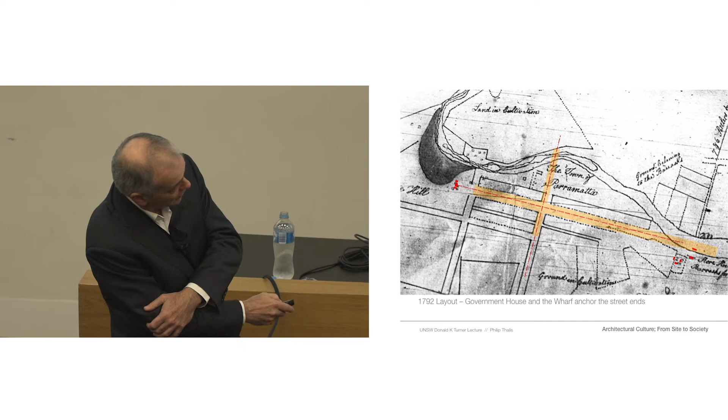200-foot wide street, which in a sense is the extension of the space of the river itself. Of course, the journey was up the river to Parramatta before Parramatta Road was established. And so you arrived at the Queen's Wharf, which is unfortunately no longer there, but you can see the spot. And the street went straight in and up to the rise, which is where the Government House was put. There was also the cross street, Church Street, which was marked by St John's Church here, and then the jail and a bridge, which I'll talk about shortly.

But there was a very important change, and this also affected the centre of Sydney in around 1805, 1806. So whether it's Governor King or under Bligh, these streets, as they were in the city centre, were narrowed from 200 feet to a much more rudimentary 66 feet. And George Street, in fact, was narrowed. You can also see Church Street being narrowed there.

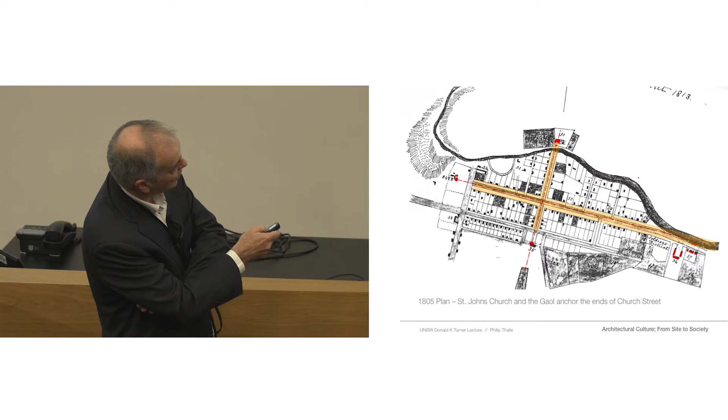And we don't know exactly why this was done. I've never read anything about it. We haven't been able to research this, and it's a very interesting further dimension of public Sydney that someone else could extend. But I think it's had a devastating impact on our sense of generosity of public space. And of course, if you go to a Melbourne or a Canberra, you'll find that the street reservations are much more generous. In fact, they're some of the most generous in the world.

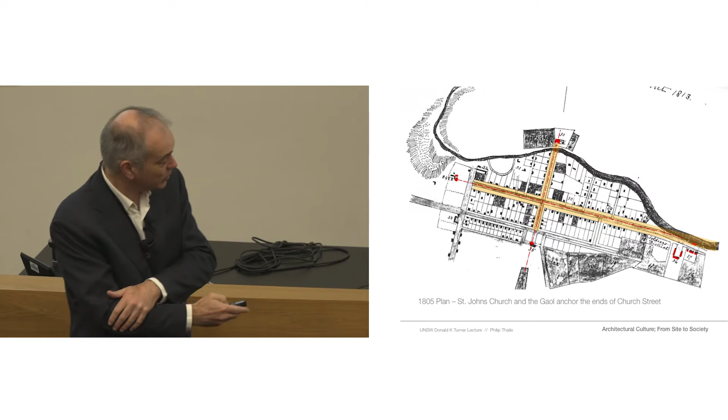But that was the aspiration in 1792, and of course that's nothing to do with traffic, it's to do with a sense of place. And when the first Europeans arrived in Parramatta, they actually talked about it being like an English park, which was because of the Aboriginal practices of fire stick farming, so it had tall canopy trees and grasslands. And that was the way of the Aborigines managing this. I could have put in some quotes about that. It's a very interesting issue. So very interesting to look at Parramatta.

And then we had a project as part of designing Parramatta, but in fact it was a revisit of the project that we'd already undertaken when we did the DCP for Parramatta City Centre in 2000. And that was to look at whether we could interpret the 200-foot width, 60-metre width of George Street, which is still there, and reconnect the city east-west on its spine. And so if you go to George Street, what you'll find even today is that many of the taller buildings are actually built back on that earlier alignment.

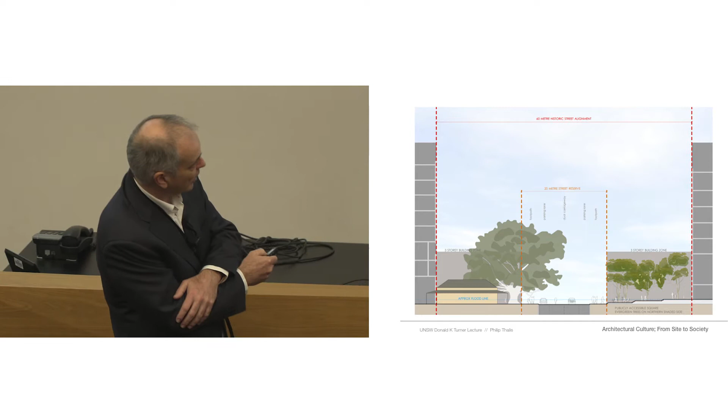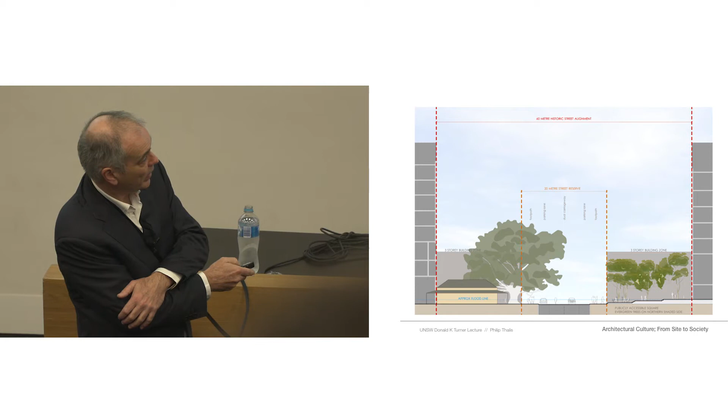And generally what occupies the space between the two alignments, and it's not exactly centred, it actually shifts from one end to the other, which we've very accurately plotted, what you find is all the heritage properties. You find some of the significant trees. You find, in fact, a number of the public buildings. And so it'd be quite easy to have a double scale where you actually allow the taller buildings, which are inevitable in a city centre, to come at this scale, but you can still read a secondary scale within the street.

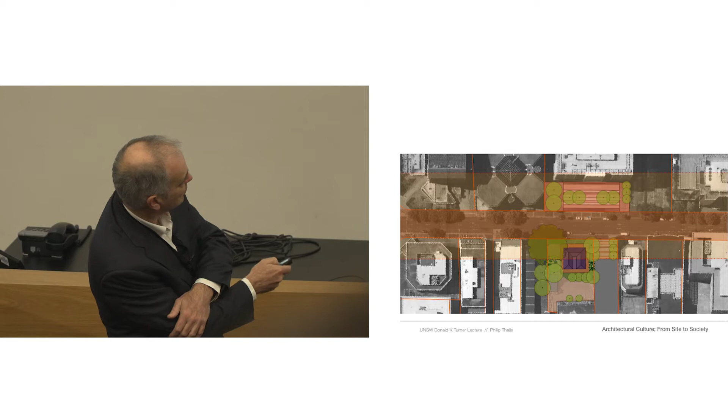And in plan, you can see it here, and in fact, this is the building which the light rail company is in. And they've got a big square in front of them. Here you can see the heritage buildings, trees, this huge fig tree and the like. So it's actually a project which, with vision now, could be implemented very easily. And what it could do is actually create not just the north-south axis of Horwood Place, but in fact this wonderful double-scale avenue which talks to both the original foundation plans and then the lived life of the city over the 230 years since that time. So all these buildings, and this is a wall, would be in that space.

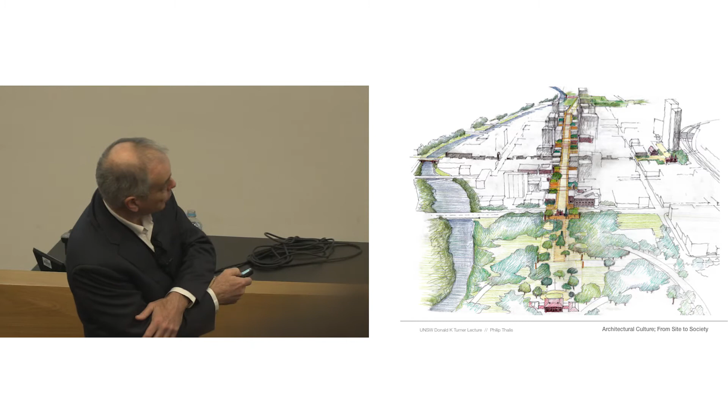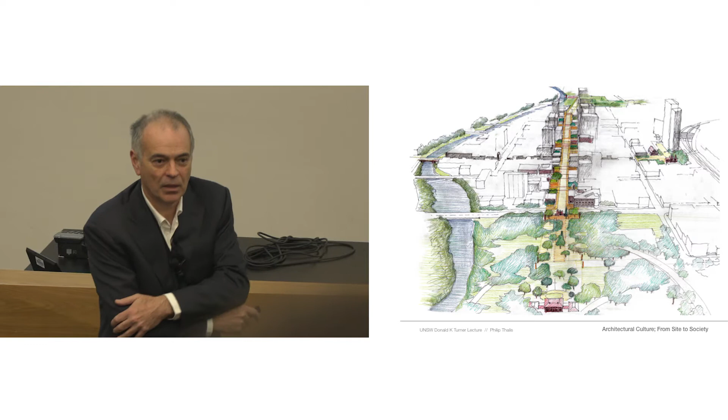And so the intention and the drawing that we did for this public Parramatta project, and the projects with the artists Michaelie Crawford and Jenny Turpin and Jane Irwin, the landscape architect who just came in. So the project you can see from Government House, the double scaling of the street, the reconnection and reinterpretation of Queen's Wharf, the extension of the river into the town. So the attitude that I bring is not one of being a historian or an architect, it's one of actually trying to fuse culture and fuse an idea of place and make a project for today and into the future that understands the history of the site and projects it forward in a positive way.

So it's not a sense of loss, it's a sense of what can we add, how can we make it live today. And of course, there's also the gatehouse in the foreground. There's actually lots and lots of other towers proposed.

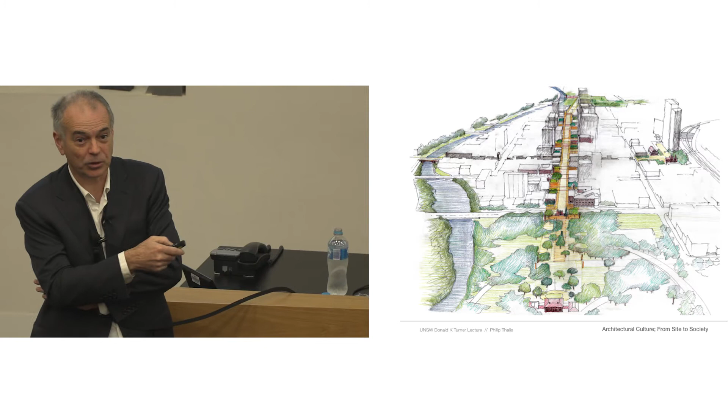The other aspect I want to talk about is then our two projects on the riverfront in Parramatta. And so just the other thing to say is, of course, just as the light rail is being put rather inexpertly into George Street in Sydney, there is a proposal to put it in Macquarie Street. It really should run in George Street, and it should run right out to Sydney Olympic Park.

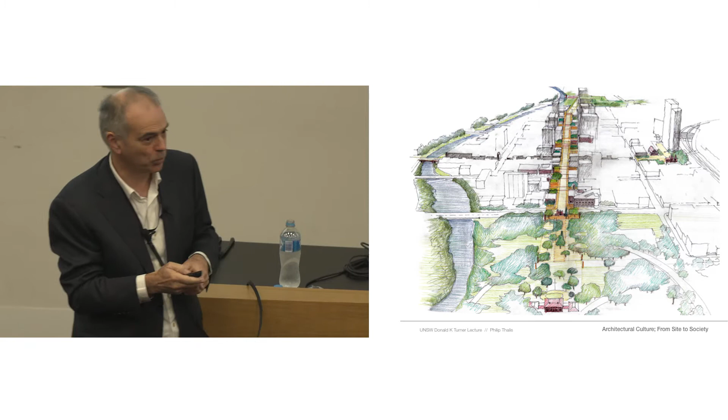If George Street's the most important street, it should actually have the most attention, and the light rail needs space for the stops. In fact, that would work beautifully with this concept, because you could actually insert the stops much more seamlessly than in the other narrower streets of Parramatta.

The other very interesting cultural program, and this wasn't in the early plan of Parramatta, where most of the riverfront was in fact private, but Parramatta sits between the park of Parramatta Park to the west and what should be the garden, the actual garden suburb of Rose Hill. It's just a bit short of public space, but we're trying to help council extend that idea.

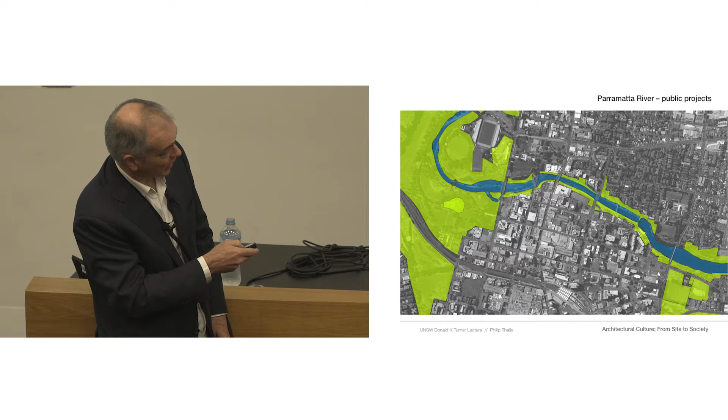But the great project that the City of Parramatta has been implementing over years is to reclaim the foreshore as public land. And the two projects that I'll show you is our work on Lennox Bridge, which is complete, and then the escarpment boardwalk, which is actually going to tender tomorrow morning, and there are people in the office working on it now, not me, I'm sorry to say.

Here's Lennox Bridge, which was doubly extended, had a tram line put on it. In fact, it's going to get a new tram line put on it after our project. And we added, at the riverbank level, 2 portals through the bridge, which are pedestrian cycle portals. And when you see the geometry of Lennox Bridge, the curvature of the path is really to create a setting which Lennox Bridge never had.

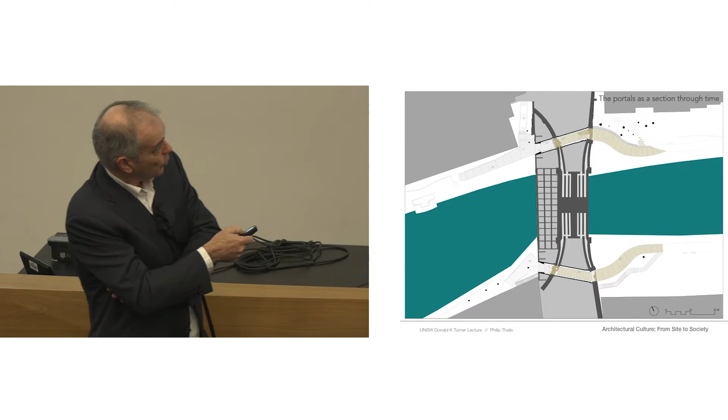Now Lennox, in 1835, there was discussion between him and the Assistant Surveyor General Perry, where Perry in fact wanted portals and Lennox said he didn't want portals. And they had an argument that went all the way to the Governor, and the Governor said, well, as the foreshore is all private land, with the exception of this side, we won't put portals in.

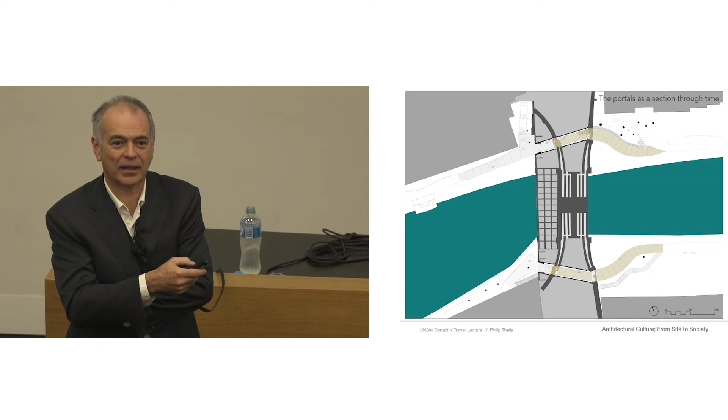Of course, this is the argument we had again in 2010 when we started this project again, and in fact now all the riverbanks are public land, and the bridge is a blockage to the public land, and so the portals were the preferred solution. But you can see that when we inherited a feasibility study by Arup, the idea was to take the portals straight through these curved sides. We in fact displaced them to the outside of Lennox's geometry, and I'll show you why.

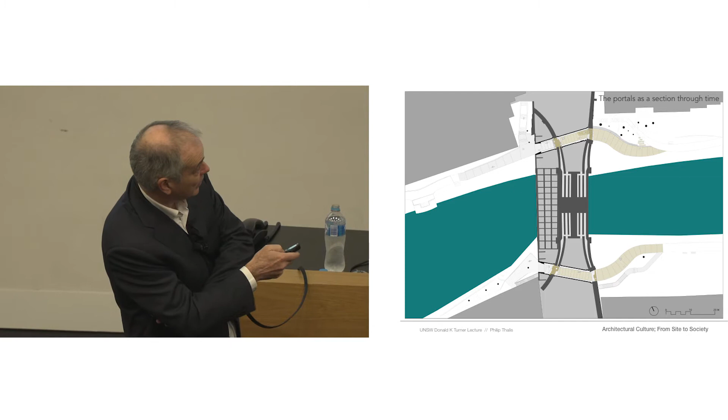So really the portals are a section through time, and we wanted to make that apparent. So when we had to actually cut through Lennox's walls, we cut through with surgical precision so that it's a new intervention. And in fact, there's a 2-ton stainless steel shelf angle, which is an interesting detail.

Because the Heritage Council said this is basically over our dead body, one of the conditions was that the bridge, which was in a very dilapidated state, was restored. With Design 5 we reinstated the balustrade and cleaned the bridge forensically, so it's probably in the best state it's been since about 1840 in terms of its cleanliness and the sandstone.

You can see the curvature, the curtilage for the project, and then the portal. We aligned the portals at this point because we didn't have to cut here. This is where, in fact, it was an unbonded connection. We inserted the lintel, so we didn't have to cut the stone there—we only cut this side. It's like a surgical extraction. There's no new fabric other than two centimetres of steel lintel on the face, on the outside of Lennox's

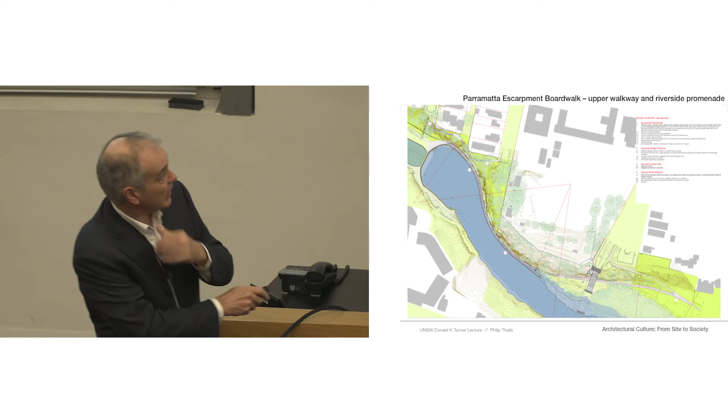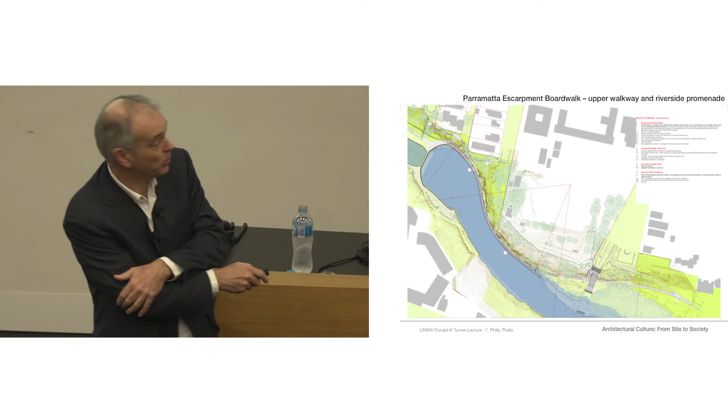At the eastern end, now about to go to tender, is the sort of yang to that yin: a 500-metre boardwalk, of which 250 metres is suspended over the water in this S-bend, then goes to land under a heritage bridge, MacArthur Street Bridge, where there's a place and an artwork by McGregor Coxall, this project, also with Jane Irwin, connecting to the existing path system.

We've had to re-document it because this is in concrete to withstand ferry impact. There's now an upper walkway in metal which cantilevers over the lower one. You can see the curve of the lower walkway and then the more miniaturised curve of the upper walkway above it. So while one project is a project of historical excavation, this is a project of addition.

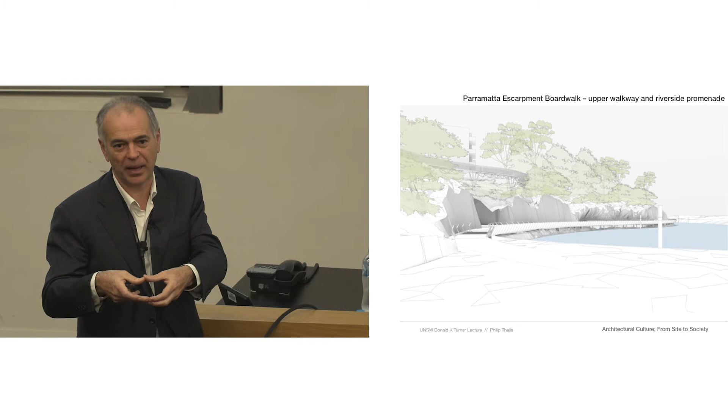They're completely contrasting in almost all of their values, but what they will do is take this maroon part of the riverbank and extend it into Greater Parramatta, allowing connections to the University of Western Sydney and the like.

It's very important in intervening in one of the only places where shale is visible in Sydney. These are cut shale cliffs, but you'll be able to go there and see the construction in due course, we hope.

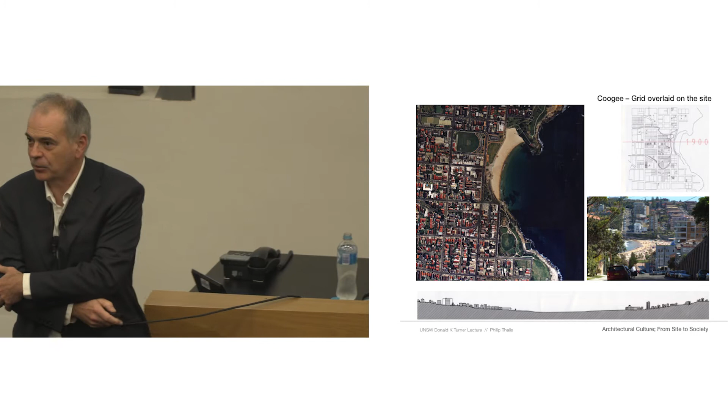We're actually fascinated by the material of Sydney, and we see the city as a resource. We've also, through our teaching and research, been forensically trying to find the great foundation projects of the city, and this is one we're particularly keen on.

Coogee, which is actually a plan by Sir Thomas Mitchell, the Surveyor General, in 1836, redone in 1856. It has this most extraordinary relation to its topography.

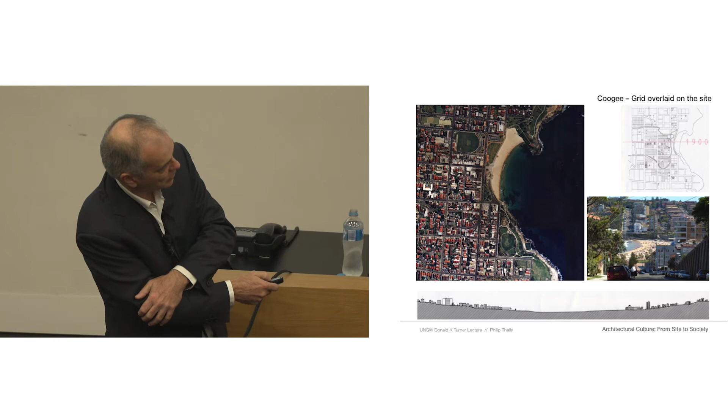This is a cross-section that our students at UTS drew through Arden Street, one of the steep streets in Sydney, and this is an aptly named street, Beach Street, which actually has a beach in it. There's a lot of criticism that these streets don't follow the topography. In fact, the Americans, if you go to San Francisco, call these section streets, because they're streets that reveal—and are challenging physically to walk around—but they reveal the topography.

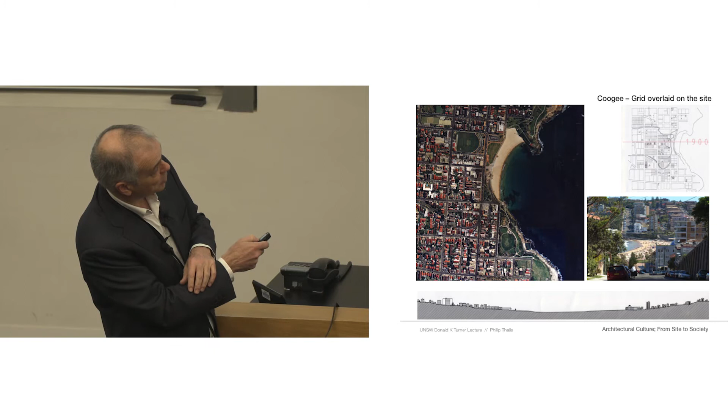It's fitted quite precisely to the Coogee Basin. In fact, all the foreshore was reserved as public land. You can see the creek line, which is a series of parks, and you can see Coogee Bay Road is centred on the beach.

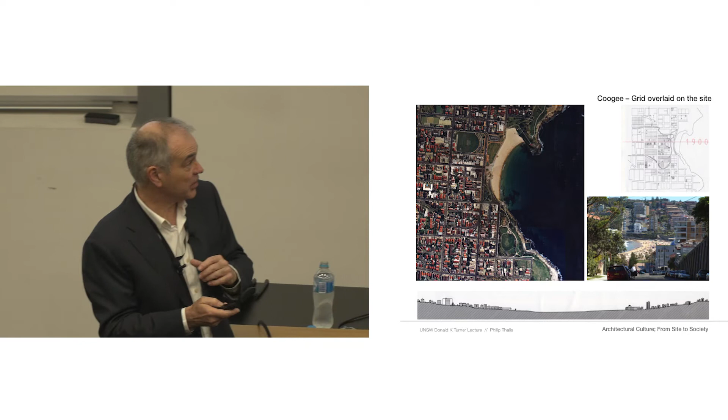You need to look at these plans, you need to look at the city, you need to find the good projects, you need to understand why the pieces of the city are good relative to other parts of the city, and you need to assimilate them into a cultural attitude to site and to the construction of the city and architecture.

It's something that's fascinated us our entire career, from when we won the Olympic Village, a project we then developed with quite a host of people. Our team had Peter John Cantrell, David Hirsch, Peter McGregor, Philip Arnold, but Rod Simpson, Andy Wilson, Andrew Burgess were other winners. This was a collaboration which was the official Sydney bid scheme.

It sought to interpret the armaments depot at Newington and keep all the lowlands as park. So the thing about the site—it had a ridge road, of course.

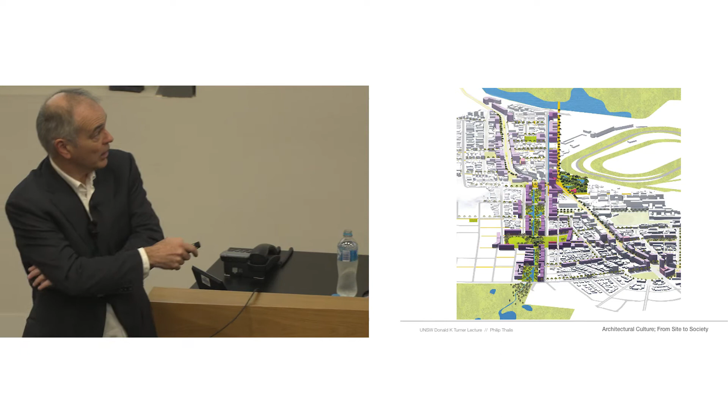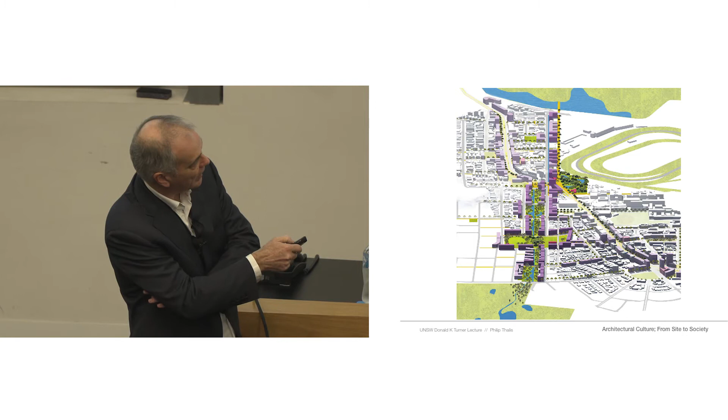But equally, there's another line which is very important here, which is the creek line, which came through here. And so our project with JMD Design and Bennett and Trimble, rather than simply stacking the density on the main road, which seems to be a Sydney disease, why put the greatest number of people where there's the least amenity? Where there's actually the greatest amenity, but also the need for repair, is on the former Mill Creek alignment. And so by making this more generous, we'd relieve the flooding which afflicts all of this area, including the university, and make a place to live in a far better urban environment. And this could be done either by acquisition or by development agreements.

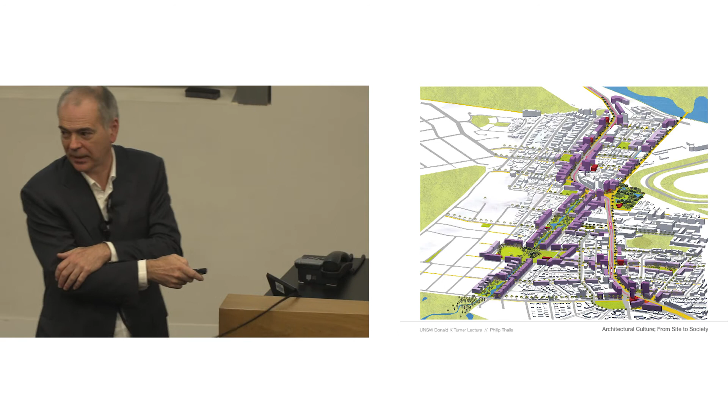And so here you can see that while there was some increase along Anzac Parade in order to make squares, in fact, this parallel move, and talking to Helen about the need for a cycleway to get to the university as well, which was part of the plan. There are a number of quotes that I've included about the importance of site. And siting architecturally is critical to Sydney, and so of course this lighthouse, Barnet's copy of the Greenway original; Greenway predicted it would fall down when it did.

And this was really the internet of its age, because this was the point at which ships approaching Sydney were sighted, and they relayed this message back into the city. It announced the presence of Sydney to the wider world, and to people who'd been at sea for months. But it also announced back into the city that news from abroad was coming. So it's extraordinarily symbolic, and we perhaps don't appreciate that symbolism. But of course, architecturally, it's emphatic in its form, it's emphatic in its siting, and there's this extraordinary dialogue with that greatest of public works, I think the greatest public work of 20th century architecture, the Opera House.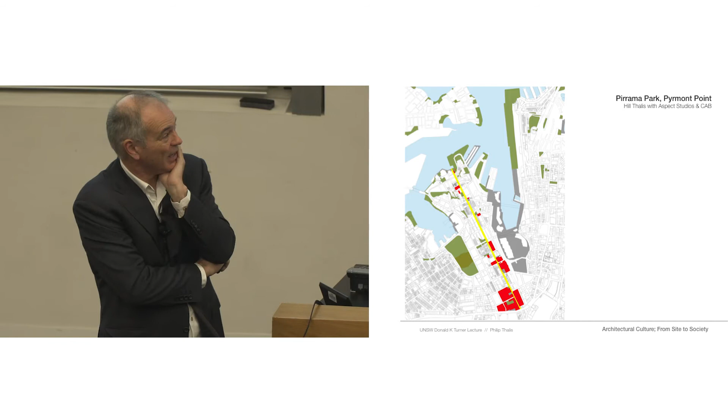It's part of a fantastic 2 hectares of a 4 hectare park at the end of Harris Street. We often think of Macquarie Street having the main public buildings in Sydney, but in fact Harris Street's got just as many—think of ABC, UTS, Sydney Technical College, the Powerhouse.

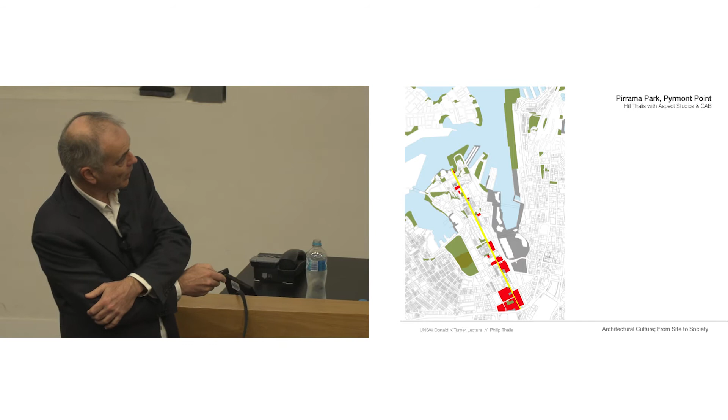The council buildings, the pool, other buildings along the street up to the community building, and then we had the last public building—but also, on the prompting of Richard Leplastrier, hollowing out the waterfront, as I'll show you, to make this bay, and taking the structure out so that Harris Street would finish at the waterfront again.

So here's our sort of ephemeral public building, this canopy. As we always tend to do, rather obsessively, we researched the site from its earliest subdivision plan of 1836.

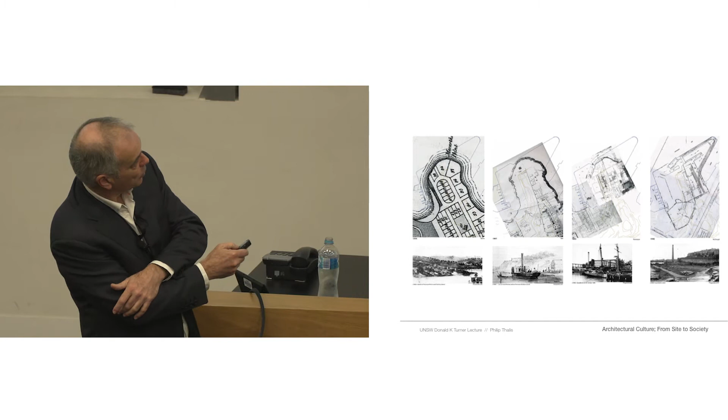This proposed a very upmarket residential area, through its various incarnations of industry, through its condition in the Second World War, where it had been requisitioned. The demolition of the baths happened just at the end of the war, and then we overlaid all of those different parts together—trying to understand it as, I think many people have called it, a sedimentary city, the city on the city.

So which of those elements would we interpret in our project? Interestingly, when we took this to public consultation, everybody liked the idea of, if not a beach—which was impossible to recreate—at least a bay that allowed people to come down to the waterfront. So that's what was hollowed out at this point.

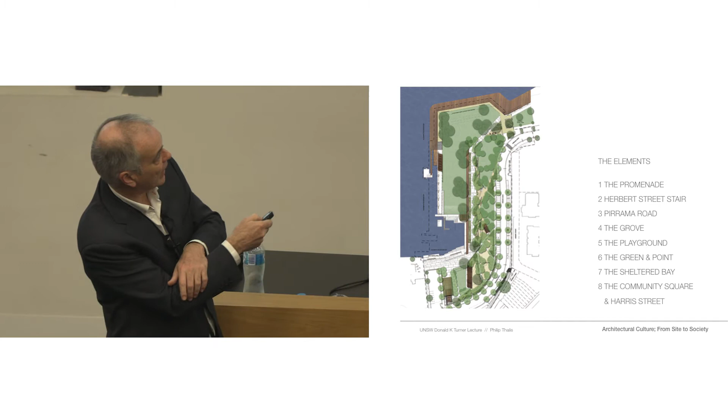There are a number of elements, one key organising one being the retention of some of the industrial archaeology, which sits on the line of the original shoreline. We'd have a grove of native trees, Sydney red gums, on the land, and on the relatively flat area of reclaimed land we'd have exotics, the fig trees and the like—this contrast of nature and culture that actually comments on the place.

Here we'd have a more urban termination to Harris Street, and then a stair, which I'll also show you. So just quickly to cut through to the elements: the retention of the dock wall as the promenade, a choice among different ways we'd seen.

The fantastic Glebe promenade actually was too successful—it couldn't cope with the amount of people—so you needed a certain dimension, and it also gives you multiple routes.

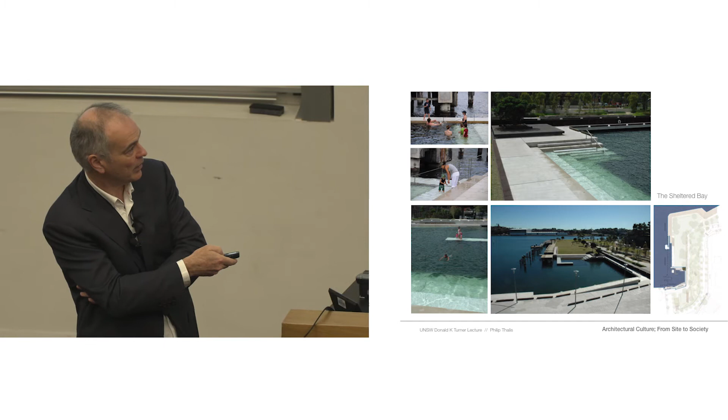Of course, the bay—we didn't realise how many people would love to dive in it, but it's very popular, and as the port moves, swimming in the harbour will be a major activity. Whether it's a human or a dog, it's great.

This staircase, which we cantilevered off the sandstone—Pyrmont has a great culture, it's a great quarry of the city, and so we wanted to make a staircase that touched the ground lightly. It's completely supported off the cliff as a cantilever, so it had to be documented and re-documented when the bolt holes were actually surveyed and re-engineered.

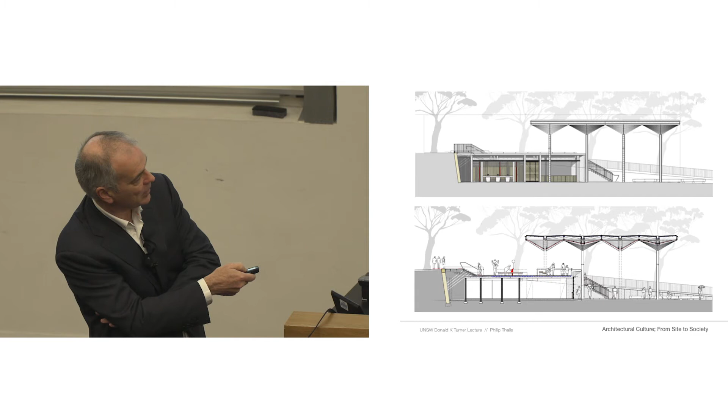New shop drawings for the canopy, which is an ephemeral public building at the end of Harris Street, with the necessary services and a cafe underneath, with a belvedere above. You can see the section of it there on Harris Street, and then this belvedere at the upper level that looks out over the park, and the canopy roof, which is uplit.

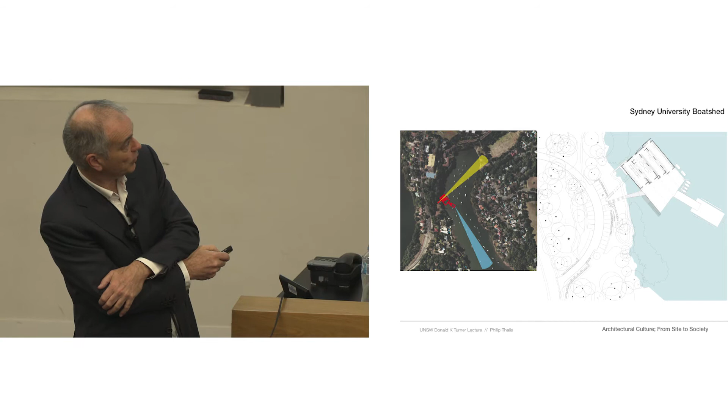Another project that takes the site as its starting point, and I'll only show you from a distance here, is Sydney University Boatshed, where it's in a park. In fact, it's over the water where the boathouse had previously been. It's a shed, basically, an undecorated shed, where the different lengths relate to the different sizes of boats, and the different apron lengths relate to the boats coming out and being stored inside and outside.

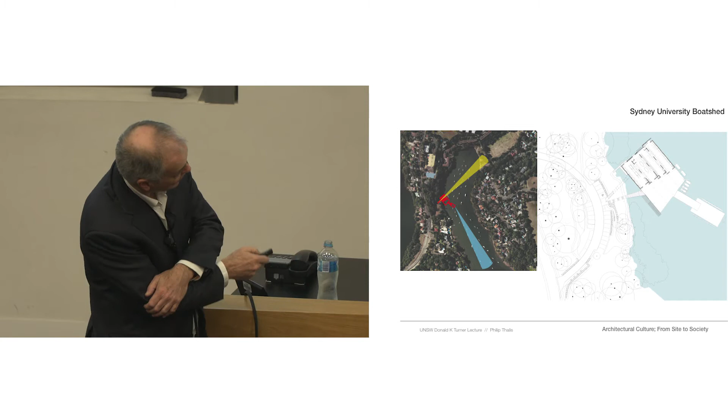The geometry is about the boats launching down the bay, but the upper level is about the view through the middle of the building to up this gully and in fact to Chatswood. And so you can see the view down the bay where the boats leave, and then the view through the upper level where in fact there's a far smaller amount of program upstairs than downstairs.

So the amenities on one side and the common rooms on the other side here. So a very tight building with a ramp up through the middle. Some architectural antecedents which I won't go into here, but you can guess for yourself.

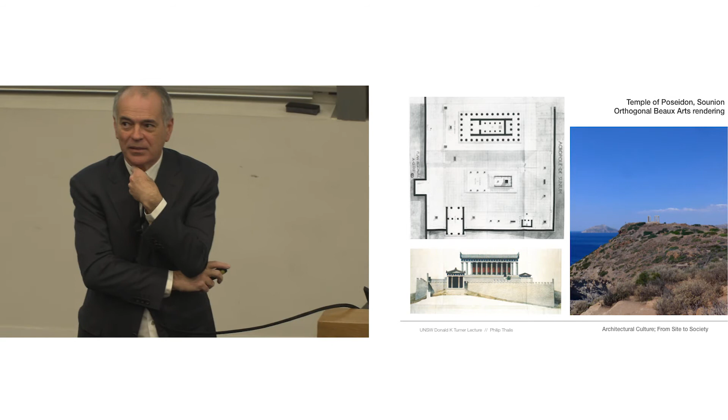I want to talk about some houses. We don't normally talk about some houses, and Laura Harding is hiding somewhere in here. And so these are two houses that we'll show. But this interest in, I've only included, because I already had too much material, I've only included these very brief images on the temple of Poseidon at Sounion. I don't know how many of you will have been there.

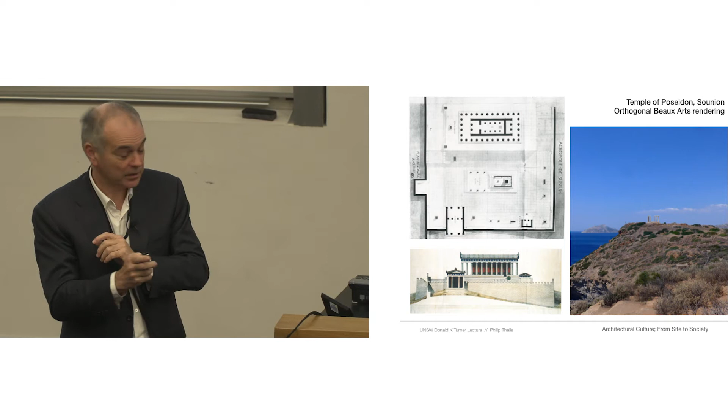But this is a Beaux-Arts rendering of the temple of Poseidon, and what it showed is this is the gatehouse, the altar and the temple, and you look at this and you think, perfectly orthogonal, very Roman, not very Greek at all. And that's how the Beaux-Arts thought in terms of these axes. But there's another way of looking at it. If you know Constantine Doxiadis' book, his doctoral thesis, where in fact he said that these are meant the visual cones on either 30 degrees or 36 degrees, relating to either the Ionic or the Doric order.

And the Greek temples were actually meant to be seen as bodies in space. Thought of this way, you look along the face of the columns at the front and they appear as almost solid. You're looking down a series of columns catching the sun. And then you're looking through the columns of the long side here. You also see it as a body against the sky. And then there's the movement up the hill to the temple. So I always find this fascinating that there's actually two readings you can apply to the same physical place.

And it's something that we then tried to apply in a couple of houses, which I won't say exactly where they are, but you probably can guess if I just go quickly. This is the layout of a house on site, and you can see that it's actually oriented to the point where the land meets the water. So that's the axis of it. That's partly necessity because bushfire actually pushed it over to the southern side of its lot, and so we couldn't have gone any further north.

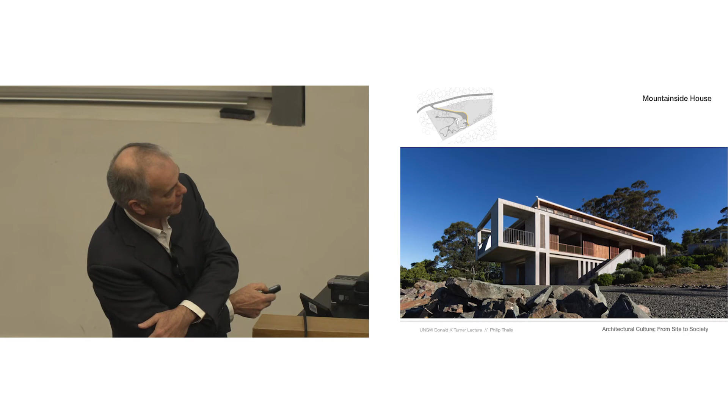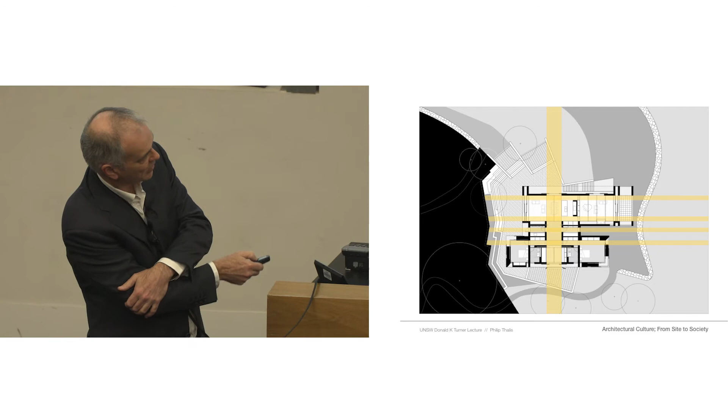So that determined a linear house, and it's a house that goes from one story actually dug into the rear to elevated at the side, but is in fact on the level on the cross axis. So the plan looks regular. Pieces haven't shown up on the plan. So the plan is actually organised orthogonally, a bit like a Murcutt house in terms of two pavilions, a living pavilion and a bedroom pavilion, but there's also this cross-axis on the level, but then it's also got diagonal views. So sorry, this is all meant to be highlighted in the drawing, but hasn't come through.

So the house can be understood orthogonally from side on, but it also can be understood as oblique views capturing landscape and through it, including underneath it. So the living room orthogonally, and then the oblique views to the escarpment, which are framed views by the structure. So it's very disciplined in its organisation and in the method of construction, but I'm just focusing here on the framing of the views and the framing of the elements. So again, the multiple views down the cross-axis and the longitudinal axis, and then this is the side axis on the level through the house.

Another house which we started before but are only just finishing now, and I'll let you read the quote from Teresa Moller. It's about the line in the landscape, which is very much something that we're, the organising line, the alignment, the importance of these things. And the biggest line here is the horizon. So we call this horizon house. And you come actually from above, unlike the other house where you come from the side. And you, in fact, descend into the house from above.

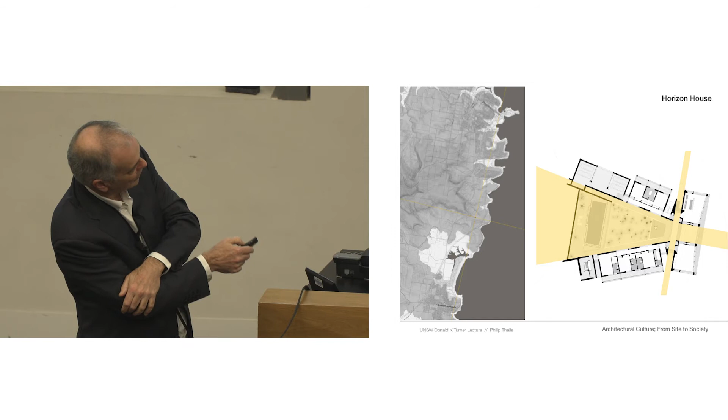But it's also about alignment because it's on the spur. And then the north-south axis is in fact to the main streets of two towns which have pine trees in their main towns. And so they're captured again, those lines have disappeared here. This is the line of the ridge and this is the urban line between the towns through this gallery.

Two bedroom wings and a living room wing on the eastern side. The house under construction reminded us of a Greek temple. It was like a reverse Greek temple. So in fact Jono Temple was involved in, by coincidence the name, the construction of these columns, which were meant to have screens, which he beautifully documented.

So this is the view town to town, and this is the view through the living room to the horizon, and we just need the full moon rising there, but we'll get there. I think Laura's actually speaking in Newcastle about the house more extensively tomorrow, which is the first time we've showed it, but if you go to Newcastle you can hear that. And so you can see the importance of the landscape and the subtle canting of the facade and the geometry of rooms to relate to views down to coves and the like.

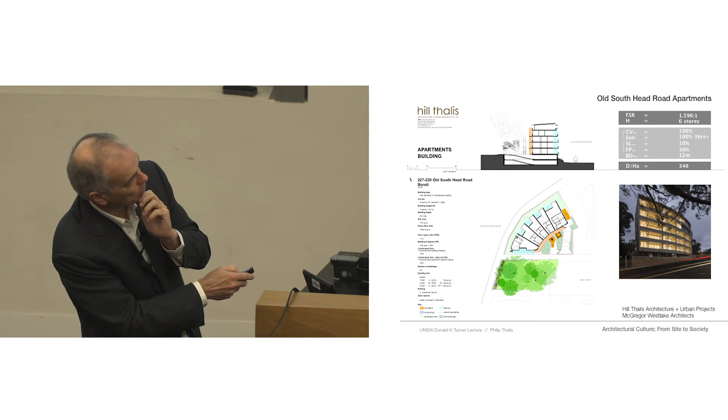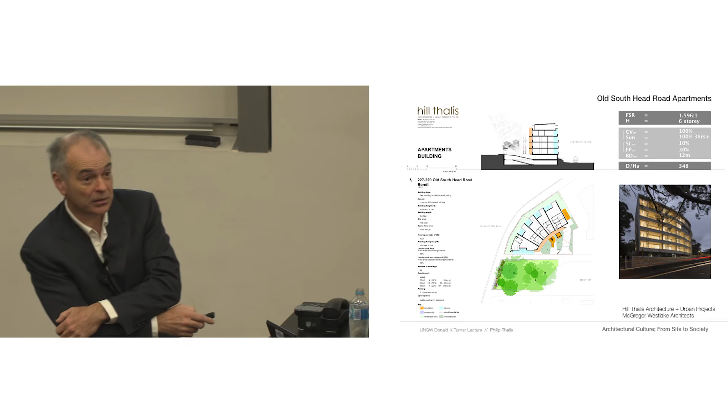So this is actually not the final building. It actually went up in floor space to about 1.7, 6 stories, 100% cross ventilation, 100% getting 3 hours sun. What's the excuse for not doing that? Why have substandard housing? Why is the benchmark at 60 and 70%? Particularly in suburban positions, that's pathetic. 2 stories of basement under the building footprint. This site's only 776 square metres and it's on a triangle on a curve. So it's a challenging site on a main road.

And it's on Old South Head Road, which has this very particular bend. And it's quite remarkable, there's not a single building on Old South Head Road that actually relates to the curve of the street. And we thought in terms of siting, that's a bit ridiculous. And of course, if you think of curved buildings in Sydney, you particularly think of this building by Bolot, which I've shown to students in lectures for decades, so it's no surprise we looked at it as well. And this is our contemporary building.

And we were very surprised in putting the presentation forward that in fact Bolot's plan has exactly the same depth, or should I say shallowness, as ours. His is oriented to northeast and ours oriented to northwest. But the other very important principle which Bolot adopted in a number of his apartment buildings, and we've found 11 so far, is that it gives you the long side with the amenity where all the served rooms in Kahn's terms are, so the bedrooms, the balconies and the living rooms, and on the back he put all the servant rooms, so the kitchens, bathrooms and stairs. We slightly inverted that to put the kitchens on the facade and the bedrooms at the back, because we had a noisy street and very small units, but these are open galleries.

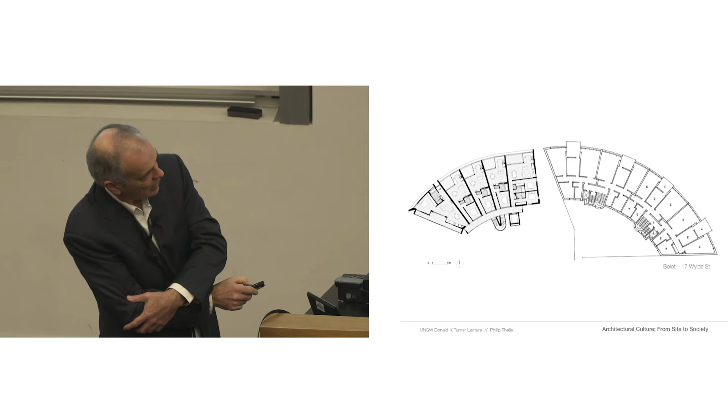But the other principle here is that you give to the north the longer facade and to the south the shorter facade. And having more perimeter to north is a very important site planning principle.

So here's the building in the street. It's got a sandstone base, which is so typical of Sydney. We even convinced the developer, he reused a lot of the stone, which is a first for him. And then you can see as it relates to people walking around the curve, the building's built in concrete, very well built in concrete. And then it has the idea of the kitchens as these glass boxes on the facade, which are orthogonal elements set against the curve.

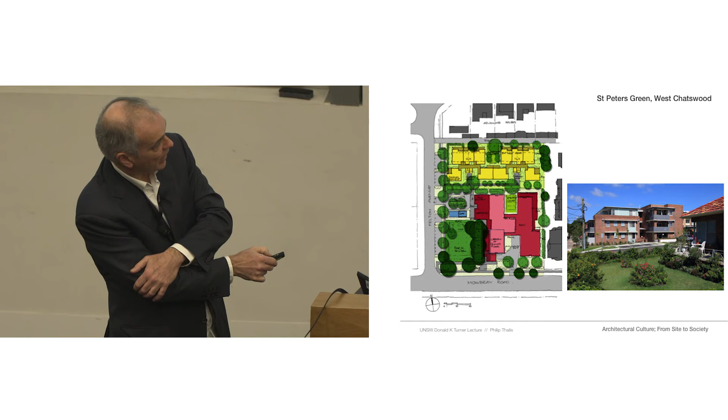I won't show too many apartment buildings, but this is a very suburban one. I've deliberately put it in terms of it's in West Chatswood. It's part of a larger aged care. It's this independent living unit, so there's an aged care building with the public library, and there's a public park that retained the trees, so we're involved in the site planning. And then its character, it's quite diminutive, it's 3 stories, and its character, it fits in is what the planners would like to say. It's not a term I usually use.

But in terms of the site planning, it's based on amenity. And so there are 3 north-facing courtyards, 2 halves and a whole one in the middle. There are 2 south-facing courtyards which are heavily planted, which have the stairs. Every apartment faces north. Every apartment looks into the garden areas. There are 2 veranda spaces in the middle, and every apartment is cross-ventilated.

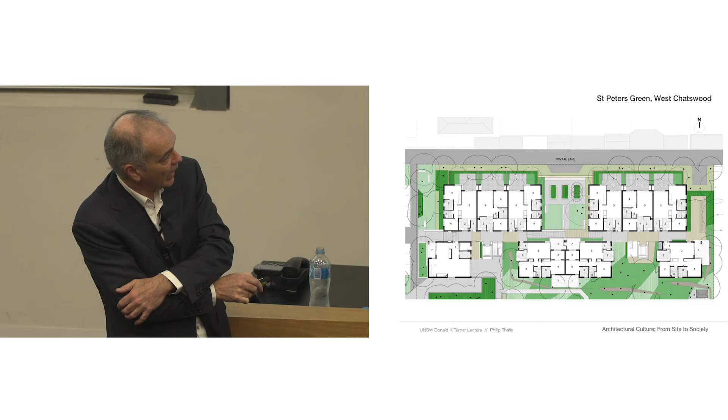What's the excuse at this density? And this is particularly important for older people who actually need the vitamin D, they need the sun, but who doesn't? So no excuse for not actually having apartments. If you design apartments that you aren't prepared to live in, well then why are you designing them at all? And that's what we say to developers time and again, be it on council like last night or to our clients.

And then the south facade, so the north facade, and east and west is far more articulated, and the south facade much plainer. A big distinction between the character of the communal parts, open verandas, stairs that encourage people to walk up them. You can build open stairs, you can build inviting stairs even for the elderly. So quite a clear character.

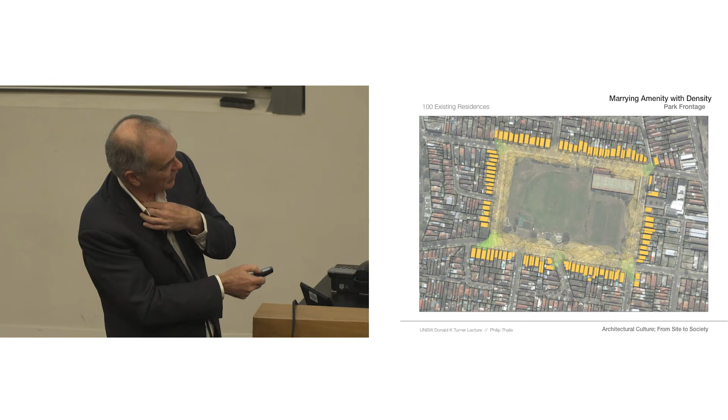But in fact, we want to extend that idea further, because really we should be talking about amenity of housing. If apartment buildings are going to be where the population lives, where you get large numbers of people living, we've got to think about them being in the best position and of the best form. And this is an analysis that we published in Architecture Australia for a planning project which lapsed, so I'm not going to say where it was. But 100 existing dwellings around a real park. This is an actual example, this is an actual survey.

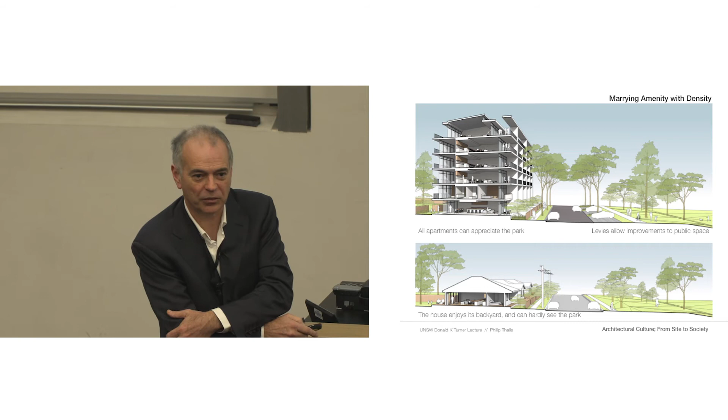If you replace them with 6-storey apartment buildings with a 10-metre average frontage, you could have more than 1,000 dwellings facing this park. The existing houses are basically single storey, so they're oriented to their backyard, and in fact they hardly can see the park because they're at street level and there's cars in the way and there's front fences. Of course the edge of the park is quite dilapidated, so if you used the uplift here to fund improvements of the park, you could underground the wires and plant real trees, you could accommodate the parking interspersed with the landscape, and every living room would have a view of the park for surveillance and amenity. And while they'd have small courtyards, the public life of the city would be improved.

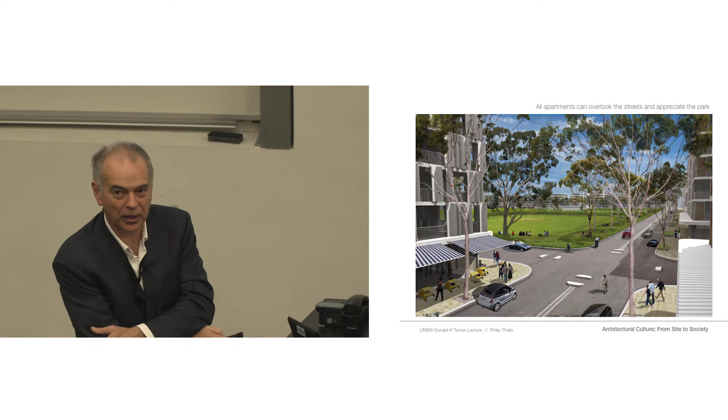This is real planning as opposed to the colouring in of zones and the like, which is just such a manifest failure. And so why can't we have this dignified mid-rise urbanity across metropolitan Sydney, rather than this crude, winners and losers and 20 and 30 and 40-storey towers for the mates who go and see the minister?

More about that later. I'll quickly go through some, and how am I going, Helen? I'm already over time? I probably am.

I'll just go through a couple of projects in Canberra that we've been doing with Jane for 5 or 6 years. There's 3 projects, and they're all in the Griffin core of the city. And I won't read Giurgola's fantastic comment in praise of Griffin, but if you want a city that's actually planned on site and landscape principles, Canberra is the great exemplar, as Giurgola recognised, and in fact other people like James in this audience recognise. I'm always nervous to show Canberra projects when James is in the audience.

Of course, the original perspectives by the Griffins had the Parliament House on the hill, the organisation of the axes, the organisation of the basins, whereas Canberra, really in the post-war period, has retreated from the Griffin legacy and has left, in fact, large swathes of the city centre empty, effectively, but it still has this incredible landscape setting and this incredible afternoon light. If you're ever there on a winter's afternoon with the sun on the Angophoras, it's quite remarkable.

Griffin's project just continues to amaze us, looking at the way that he structured this, and we've got so few of the Griffin legacy, there's so few, James, over 100 drawings out of something like 600 that Griffin produced, so we don't have 5/6 of his actual thinking and detailed work on the city. But this one's particularly interesting, which highlights the avenues, and the avenues of course intended for light rail, which is finally happening in Northbourne Avenue at the moment and will hopefully extend down to Woden.

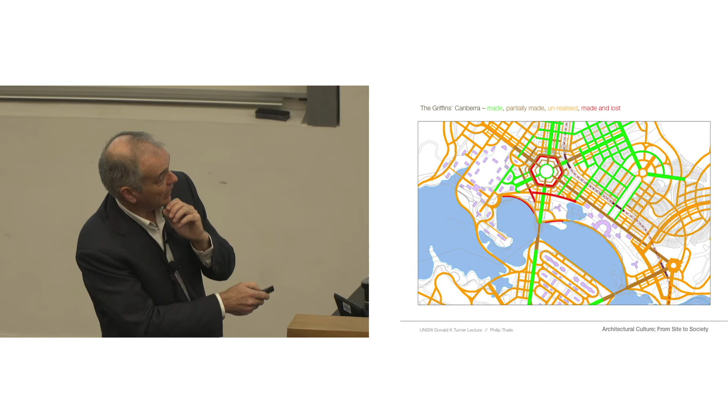We've been fascinated by Griffin's legacy, and so this is a drawing that Ben Driver in Alpha has prepared, which actually shows you the different elements, the Griffin parts that were made and are still there, the ones that were partially made. Can you believe that some have actually been removed? In particular the narrowing of London Circuit, the removal of Garden Terrace, and also the change in alignment of Constitution Avenue.

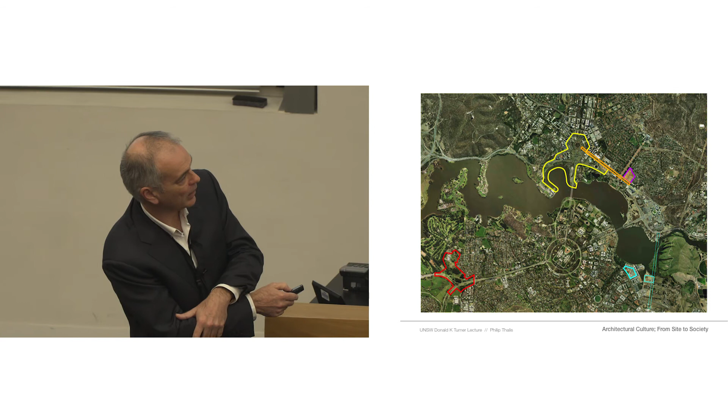We've been lucky to have this succession of projects, so Campbell Section 5, all with Jane, Constitution Avenue, City to the Lake, Yarralumla Brickworks, which we're hopefully doing a couple of buildings within. So you see that these projects, basically, this is their site. You're talking about knocking down the odd shed and removing an enormous amount of car parking and reversing the obsessive road engineering of the post-war period. And wouldn't that be good in all Australian cities rather than building it?

Griffin's work, he actually proposed that the public foreshore wouldn't just be a park, that it'd actually be full of public buildings. He did have the urbanity coming to the foreshore here. He did have this very strong geometry of the curves, and we've been obsessive in trying to work that out. But also there are these drawings. So this is Anzac Parade, and he actually produced these subdivision drawings.

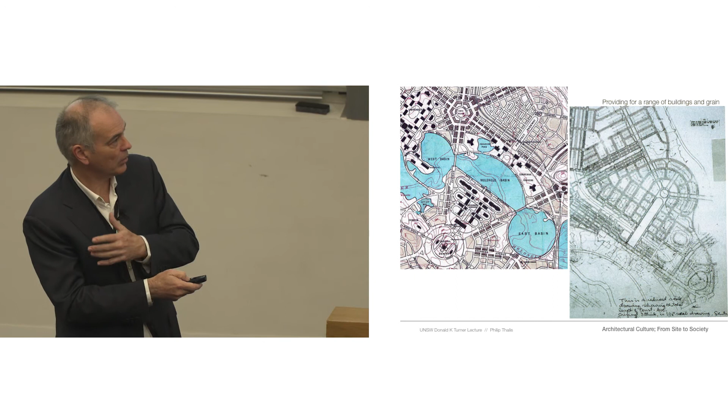And subdivision is so important because he's really saying that the density principle is where you have the smaller lots in the lanes, that's where you're going to have the more intense parts. So it's like a shorthand, and people don't understand subdivision as this critical layer of city making, which Griffin manifestly understood and mastered. So our project seeks to interpret, it doesn't reinstate Griffin, but this is, as far as we can work out, the exact curve of Griffin's foreshore.

But nonetheless, we think there's a lot of things that are quite crucial. Absolutely crucial is the extension for the first time up to City Hill. These avenues were curtailed and didn't extend to City Hill. So City Hill becomes a park which is actually included in the landscape of the city. With this missing link, Jane's equally proposed Edinburgh Avenue be extended up, so that the freeway through the city be removed and it be turned into a boulevard.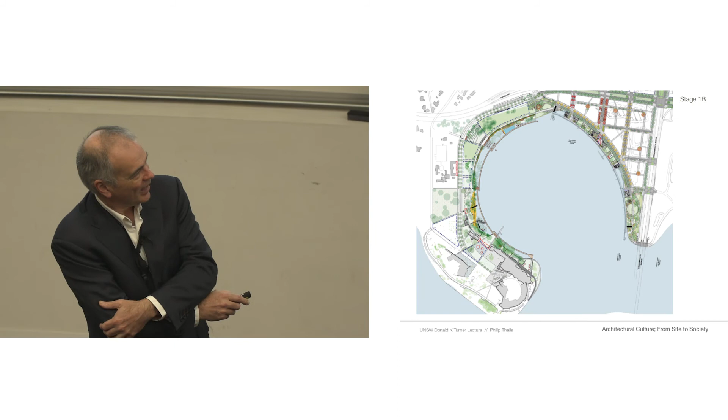Plus an urban stadium, plus a pool, plus a convention centre, plus public amenity, plus public space. Don't find that at Barangaroo. We'll come to that. And so then these are the developed drawings of the promenade. And can you believe that this bit's actually under construction? On our national foreshore, there's a D&C waterfront.

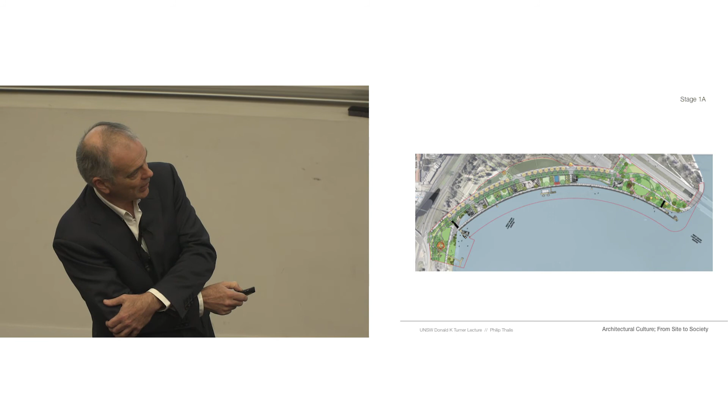And we had some involvement in doing detailed sketch drawings for the promenade, but Jane was excluded from the park and we don't even know what's being done. This is on our national capital foreshore. That's for another talk. So these are the drawings about procurement. These are the drawings of the conception.

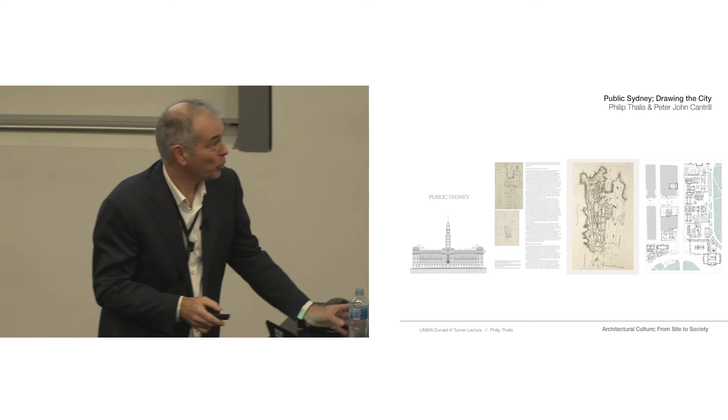So the promenade, these series of pavilions that frame a series of squares. The grand sweep, 600 metres of this boardwalk, of which they built about the first 100 metres, hopefully to very high quality, and then encapsulating the landscape of this very beautiful landscape of Canberra. So I did say that I would also talk about society, and of course our book Public Sydney is about society.

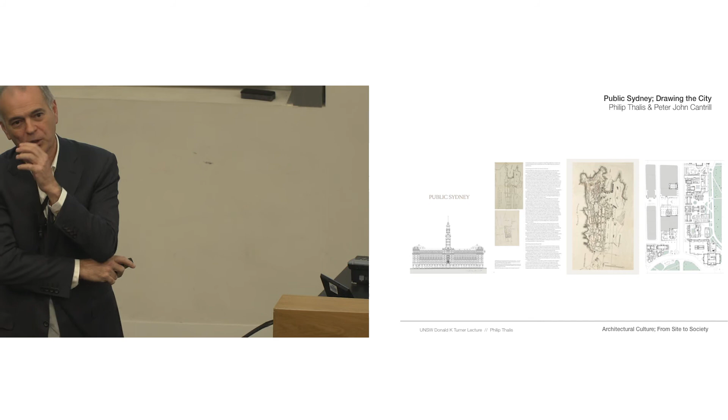It was written in some ways as an antidote to our adventures on Barangaroo, but it was also written and came from work, and some of you had to suffer our classes in public rooms, public space. Michael Zanato is hiding in the middle, but there's a number of you in the room. And so that was the class we taught at UTS, but we thought it was a celebration of all things public, and in a sense it was the antidote to the privatisation of the city that was Barangaroo.

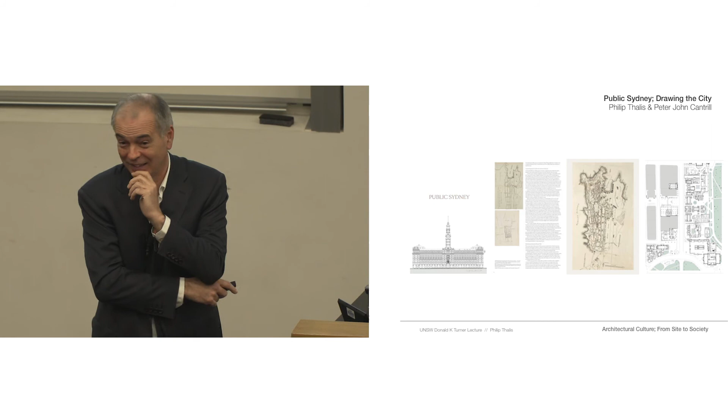We've been told that it's the only book on the Premier's coffee table, and we didn't know how to understand that, but we now think that it's being used as a sales brochure because they didn't actually know what they owned and what they can flog. So we think that the next version should be called Privatised Sydney, with a big red privatised banner, because in fact this is one of the great challenges of our time.

We do often talk about parts of Public Sydney, but I want to focus for today on the infrastructure part, which is this incredible work of public works, the Harbour Bridge. So the Opera House, on one headland, the greatest work of public architecture of the 20th century, on the other headland, the greatest work of engineering, urban engineering of the 20th century, and the greatest paradigm of multimodal public transport. A great quote from Solà-Morales about doing infrastructure well. And we shouldn't have any excuse because this is the best piece of infrastructure.

Why? And Bradfield, this is Bradfield's vision. This is actually from his doctoral thesis where he said that the bridge would actually need to be supplanted with another bridge within 60 years. Well, they built the harbour tunnel exactly 60 years after, as he predicted, because of traffic flow. He actually turned all of his projects for Sydney into his doctorate, Sydney University. And he also had an urban conception, even though he was an engineer.

So these are earlier versions of the bridge with the terrace at Lavender Bay, and then the office buildings at the city, so you'd come into the city. And so this is the 1912 scheme with a railway and the bridge. Changed the scale of Sydney, this dramatic piece of organisation and construction between 1923 and 1932, reaching across to, some people say, join the sides of the harbour. Lloyd Rees said to cut the harbour in half, an east and west harbour. I think both, a bit like Lennox's bridge.

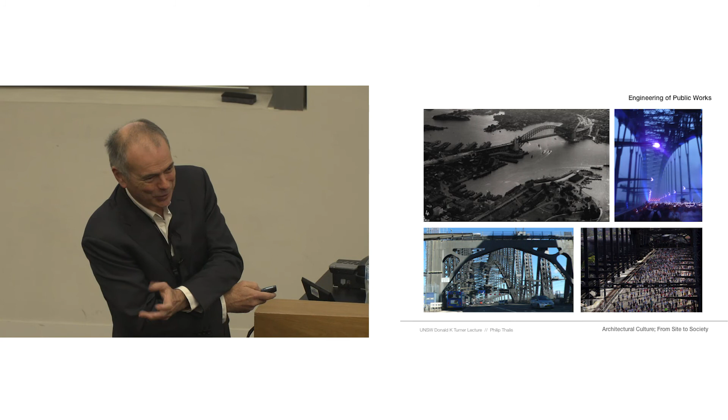So these works, like the Opera House, these generous works of public investment and public imagination, actually allow the city to develop in ways which none of us as authors can imagine. And that's a good thing. That's one of the great joys of being an architect.

However, today we find the exact opposite. What is the sense of WestConnex? What is the sense of, in fact, not just WestConnex, you can go NorthConnex, you can go Beach Connex, you can go Badgerys Connex, you can go M9, which is a great Northern Road duplication, you can go F6, which is M6. Why are we doing this? When all intelligent cities stopped building motorways in the 1950s, why are we having this orgy of motorway construction now, in order to enrich private companies who, in fact, aren't even building them anymore.

The government will actually take the risk and just hand over the profit. This is a complete distortion of real transport planning towards private profiteering. And it is one of the things we need to stop, and we have a huge civic responsibility to fight to stop this atrocity being visited on our city.

And so obviously the City of Sydney, which I'm involved in, as Helen said, is campaigning for an alternative, and these are the montages that the city has done, which are faithful to the plans. That's the St Peter's so-called interchange. That's Sydney Park, of the same size. Why are we building these things today? And is this actually the best we can do in 2017?

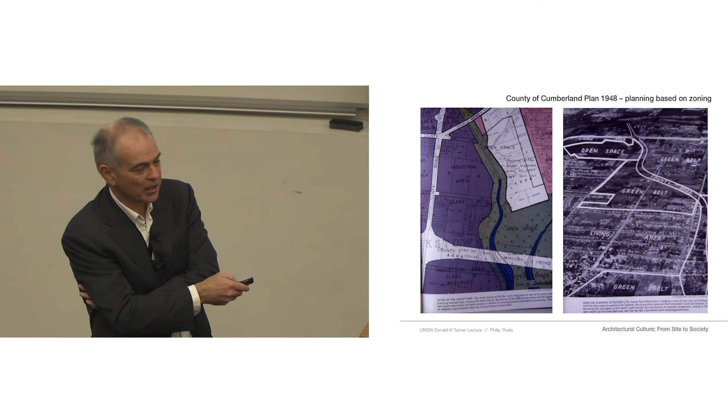I don't think so. We need to stop the current New South Wales government obsession with motorways. Because really it's just the dumb stuff of the 1950s revisited on us, as if the territory, as if the site didn't matter. Sure, it might be underground, but it has a completely scarifying effect on metropolitan territory.

And we know that it doesn't work anyway. This is how much space: 1,000 cars, 15 buses, 4 light rail carriages, maybe if there's sensible length, not the street trains, an 8-car train set, maybe a couple of metros in between.

We can't afford it - it's not only the pollution, it's not only the spatial distortion of the city, we simply can't afford the space of the cars. It's not just when they're moving, it's when they're parked, not only at either end, but at other places in between, not only on the streets, but in shopping centres and the like. The cost of cars in the city spatially doesn't get criticised anywhere near enough.

And of course, I could have put in a dozen of these. There are so many. Here's the cars, here's the people, here's a bus, here are the bikes. Come on, all the other cities in the world are getting this. Why are we being so slow, so tardy on understanding city making and the transport's role?

And here's a fantastic quote. I contrast this with Tony Abbott's quote when he was Prime Minister, of the people as king in their car. This is the mayor of Bogota, not exactly the richest city in the world, but he said, you know, a developed country is not a place where the poor have cars. It is where the rich use public transport. Well, we've got to get the politicians.

I know apparently Berejiklian catches public transport, but her vision seems to be privatised transport, and that's driven every one of her decisions on public transport. But the privatisation of the city is a disease. It's the sale of High Street and all the public housing, Millers Point, can only be described as a purge and an attack on the rights of the city.

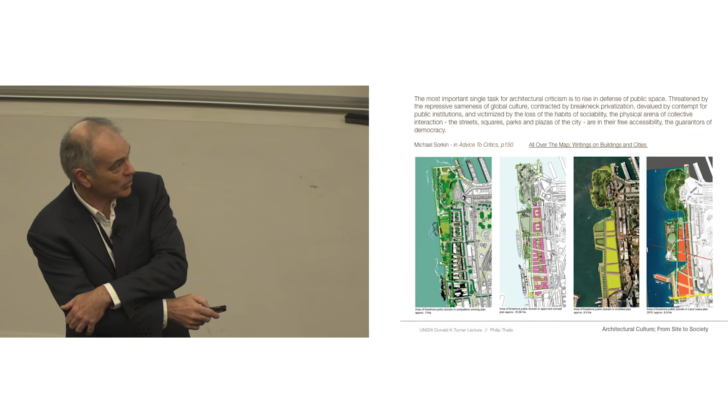But I'll just finish on Barangaroo, Helen, if you just bear with me. No excuses for selling Sydney out for the uglification of the city. And we are in, I think, the most rapacious period in our history. Even beats Askin. Gee, that's really low. And Barangaroo is really the bastardisation of the public interest and the abdication of the public interest by successive governments, Lib and Lab. What's the difference?

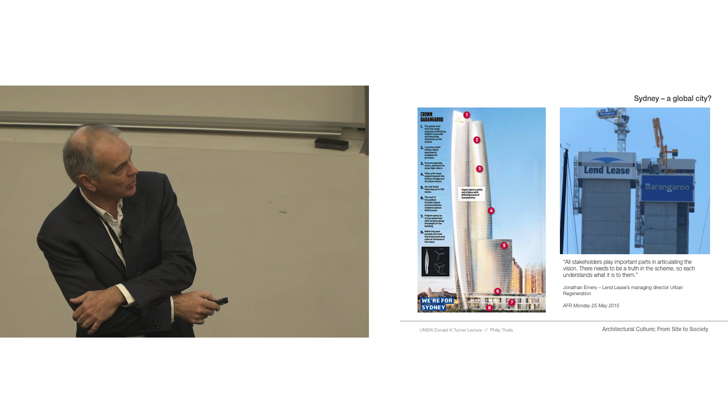And we have to put up with this sort of nonsense, this sort of spin and hype. I mean, they actually said these things. We're for Sydney. Jamie Packer, really? Where do you live? And aren't you trying to buy Israel? And aren't you on a boat in the Mediterranean? And then look at Lend Lease. Oh, they're so concerned about us. Oh, dear. The hypocrisy is really too much.

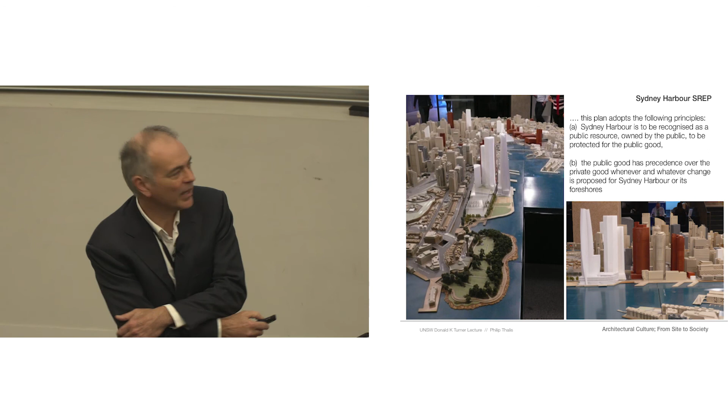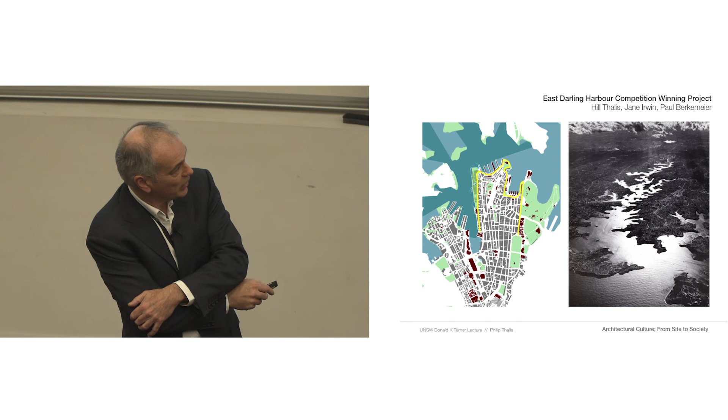That's not what we envisaged. We envisaged that as part of the city, that we deliberately drew our scheme so it would disappear, with Jane and Paul, and Laura and Michael and other people in the audience. So it would, in a sense, make the entire public foreshore of Sydney complete, so that you wouldn't be able to tell where the project was. But what we said to the jury, and this is just an excerpt, and Helen was on the jury, we said a grand harbourside park, half the site, because that was the requirement, a great new Sydney street. I'll just run through it quickly.

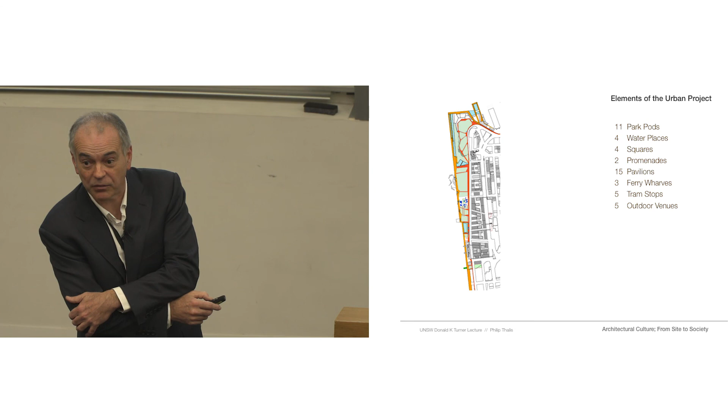Half the park, half that site area, 11 hectares of the 22 hectares plus the area of the streets. So that's 73% of the site as public space, when they're struggling to get 50, including the streets, and that's when Keating can walk on the water, which wasn't required in our scheme. The streets make blocks, the block can divide into lots, and you can get many buildings. What we said to the jury, what we think we won, is one plan, hundreds of elements, authentic diversity, the work of many hands, a robust project.

And what we also said was that the foreshore, because we knew what the problems of working in Sydney were, is inalienable public space. Well, that's the exact opposite of what's happened at Barangaroo. And it has to be something we never tolerate again in the city. And so we see the public space of the city as actually the physical manifestation of democratic society itself. And we have to uphold those values and we have to champion them for the public.